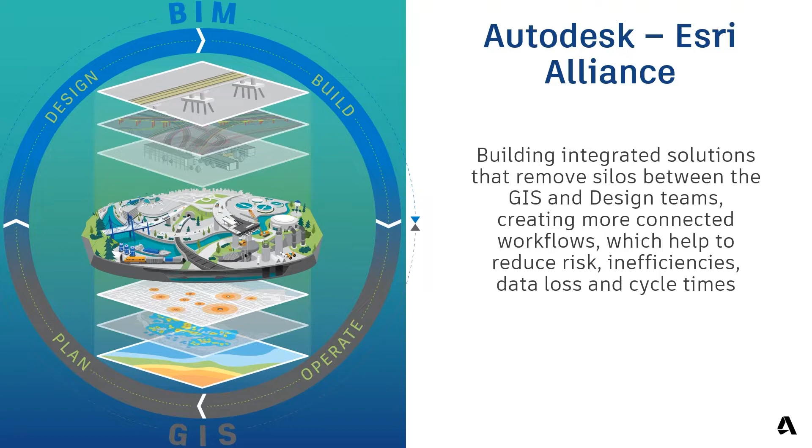Both Esri and Autodesk focused the first phase of our work on delivering product-to-product integrations and product-to-cloud integrations. Beyond product-to-product and product-to-platform integrations, our two companies have also been researching and delivering on platform-to-platform integrations.

Moving forward, we will continue to work with Esri and our joint customers to develop workflows that take advantage of our maturing integrations to add value to asset management workflows and connect to what cities want to do on smart city and digital twin initiatives. We believe that together we have the best solutions to solve customers' challenges.

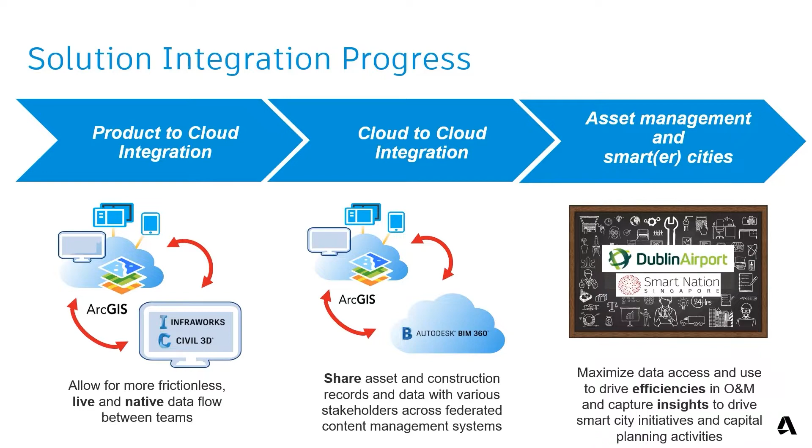This is the state of the integration, starting with a focus on what Autodesk development teams have been focusing on since 2017, which is mainly new functionality in our hero products, meaning Civil 3D, InfraWorks, and Map 3D, that connects Autodesk design solutions to the Esri platform, ArcGIS Online and ArcGIS Enterprise. This functionality is referred to as the Autodesk connector for ArcGIS.

So let's take a look at the agenda for the next slide, showing how the current functionality works. In the next 5 short videos, I will walk you through a workflow for using the Autodesk connector for ArcGIS inside of InfraWorks and Civil 3D. This workflow will show you how to connect to ArcGIS Online from InfraWorks and Civil 3D, performing SaveBack from InfraWorks and Civil 3D, and publishing to ArcGIS Online from InfraWorks and Civil 3D. There will also be other functionality and workflows shown that accompany these 3 things.

Then I have included 6 What's New videos for InfraWorks and Civil 3D and put them in order of release. You will see some of the same functionality in the previous 5 workflow videos, but this puts things in order for you, and more specifically, what features came out when. I will also take you through in a short video how this same functionality works in Map 3D.

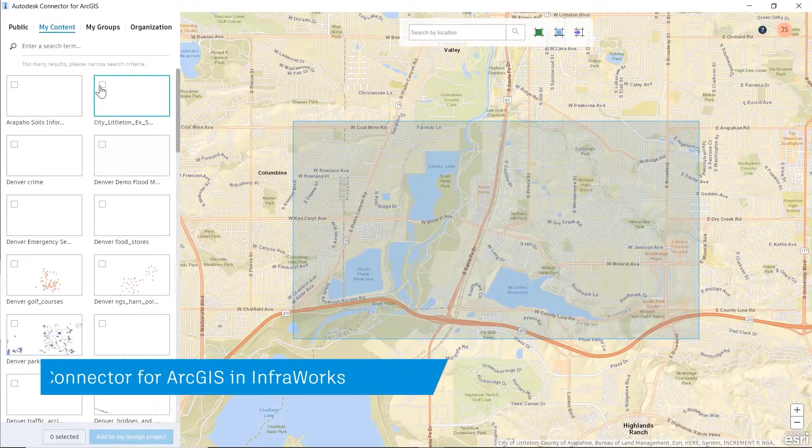Now we are ready to start using the data that we pushed to ArcGIS Online. We will start in InfraWorks and will connect to the data using the connector for ArcGIS. We will be connecting to the same sanitary sewer data that I received from the City of Littleton. Once I select the feature layer, I can map the information to feature types in InfraWorks so that the data represents what I want to see visually. I can also preview the data visually to be sure I have what I want.

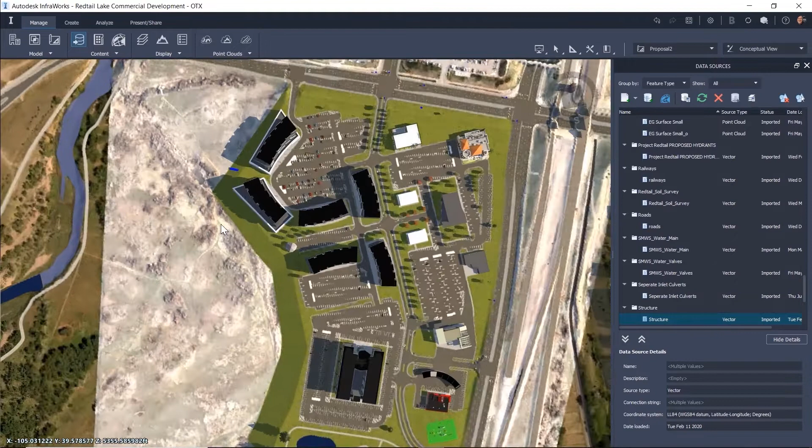Once the data has been added to my model, there's some configuration that I will want to do to represent the sewer correctly. First, if I switch to an engineering view, I will be able to see beneath the surface. This will help with visualizing the sewer lines as they populate. Next, I will configure the pipe's data source. This is the sewer lines themselves.

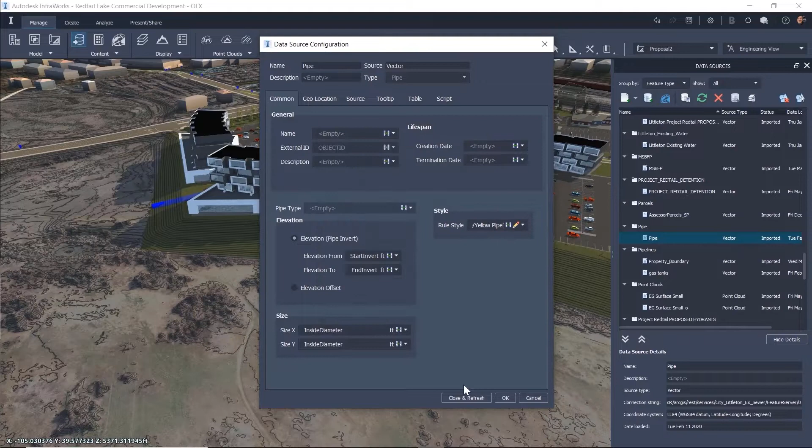I want to represent the actual invert information for these pipes, so I will map the correct attributes from the data in ArcGIS Online to my elevation from and elevation to inputs. I also want to see the correct size of pipe, so I will map the corresponding attribute to the X and the Y size to reflect the correct sizing. The last thing I will set up is the style of the pipe. In this case, I want it to be shown as a yellow pipe. After selecting Close and Refresh, you will be able to see the pipes populate and the correct invert elevations and the correct sizing, all coming from the attributes in ArcGIS Online.

Next, I will configure the way the structures will look visually. In this instance, I want to represent the sewer manholes as a yellow circle. I also want to represent the size of the manhole from an attribute in ArcGIS. In this instance, I want to change the X and the Y size with the attribute part size ID.

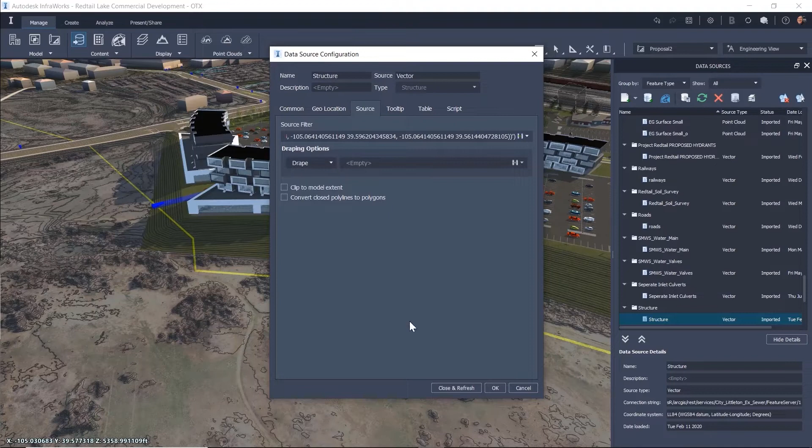The elevation offset will be mapped to another attribute called depth. I will add the attribute and put a negative sign before it and show the manhole going down in the ground. This will match the inverts of the pipe. Once you close and refresh, the existing sewer is represented in the way that we want.

You can see if we select one of the manholes that we have access to the attribute information that resides in ArcGIS Online. The same will be seen if we select one of the pipes in the model also.

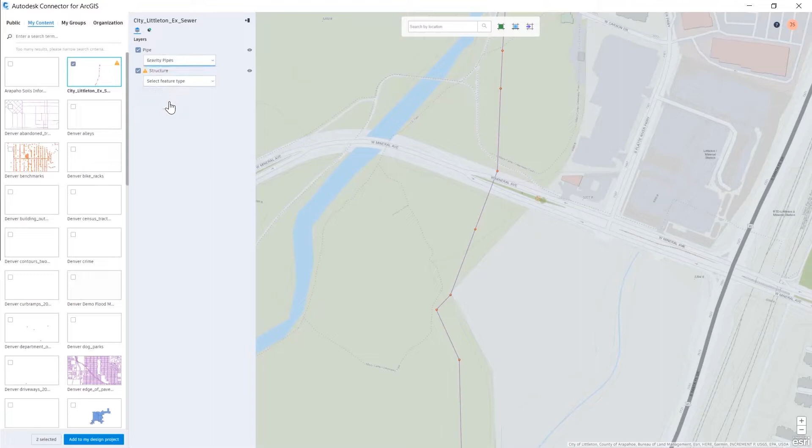Now to Civil 3D. I can connect to ArcGIS Online and the experience feels much the same as InfraWorks. I can select the same sewer information and view it in preview just like in InfraWorks. But when we map the feature that will represent the data in Civil 3D, we can make the pipes come in as gravity pipes and the structures come in as gravity structures. That means on import, it will create a gravity pipe network in Civil 3D.

With schema mapping, you are able to map attributes from ArcGIS to civil properties inside of Civil 3D. For example, the structure height can be mapped to the attribute rim elevation. And we can map the start and end invert so that the pipe comes in the correct vertical location also.

Once the pipe network is created, you can select one of the structures and see that the as-built condition has been reflected in the structure. The same has happened for the pipe information also.

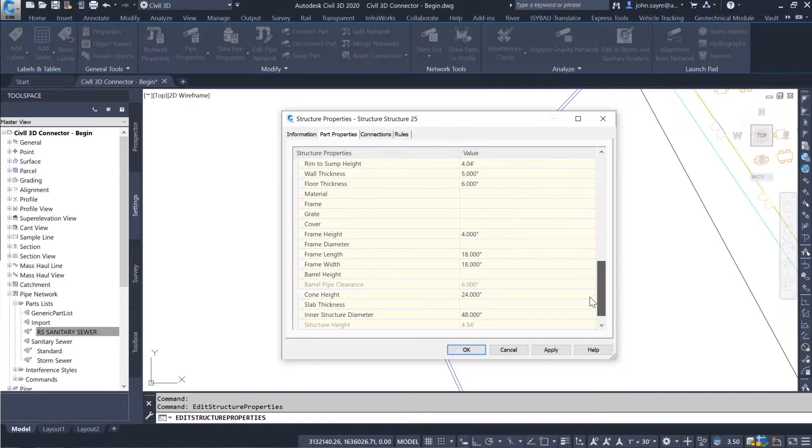We will continue the workflow in the next video by showing the functionality for save back changes to ArcGIS from InfraWorks, edit attributes in InfraWorks and save back to ArcGIS Online, refresh attribute changes from ArcGIS Online in InfraWorks, and then save back changes to ArcGIS from Civil 3D.

In InfraWorks, if a change needs to be made to GIS data that is connected to ArcGIS Online, you can perform what is called a save back in InfraWorks, and the change will update the feature in ArcGIS Online. For example, I moved this manhole horizontally in the model, then selected the data source and selected Save Back. When refreshed in ArcGIS Online, the manhole shows the location I moved to.

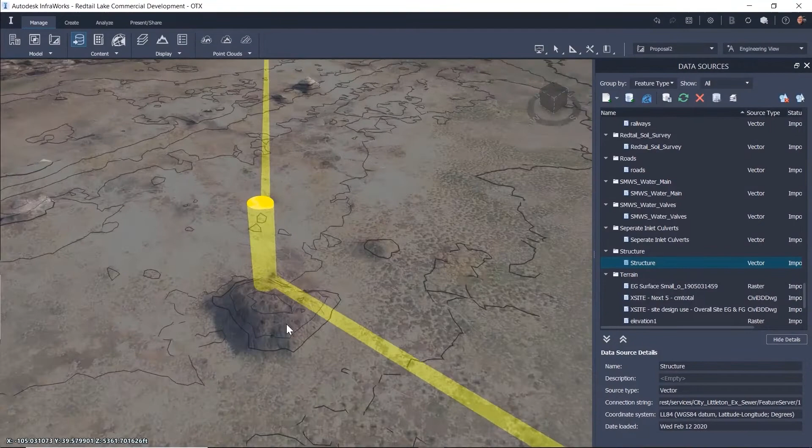The manhole has moved, but the pipes have not. In InfraWorks 2020.2, the pipes will update if you make a simple change to any of the ArcGIS attributes. This can simply be selecting the attribute and hitting Enter. InfraWorks then sees this as an update and the save back will perform correctly. The changes will then show in ArcGIS Online in the right location. This problem has been fixed in InfraWorks 2021.

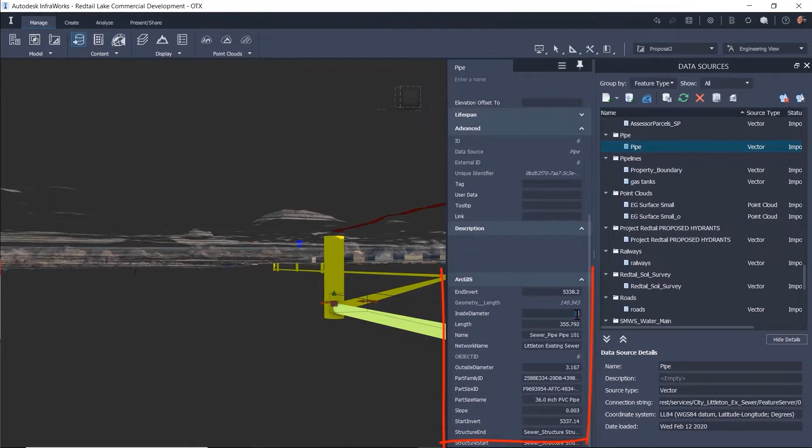You can also change the attribute information in InfraWorks and then save back to the data source, and the attributes update in ArcGIS Online. Notice I will change the inside diameter to 3.5 feet and the outside diameter to 4.0 feet. I will repeat this process in the next downstream pipe also. Now when I perform a save back, the attribute information is updated in ArcGIS Online.

To reflect the changes I just pushed to ArcGIS Online, when I select the pipe data source and refresh, InfraWorks updates the size of the pipe to the recorded value in ArcGIS Online. In this instance, it is a subtle change, but it reflects accurately.

If the pipe data was updated by a GIS analyst to reflect a change, InfraWorks maintains that live link to the data. So with a simple refresh, the attributes that were modified will update in the InfraWorks model. Remember, refresh updates the data from ArcGIS. The save back command updates ArcGIS data from InfraWorks.

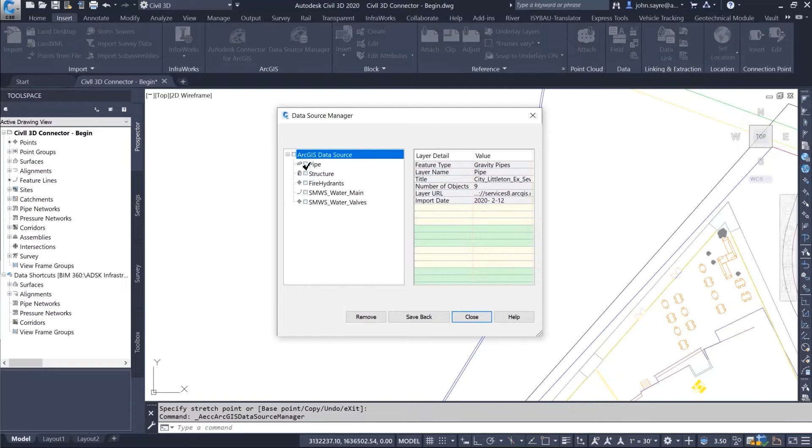If you need to make an edit in Civil 3D, you can use the saveback feature in the same manner. I will move the structure horizontally in my model, then open my Data Source Manager to access my connections to ArcGIS. Only select the data source you want to save back, then select Save Back. This will push the change to ArcGIS Online.

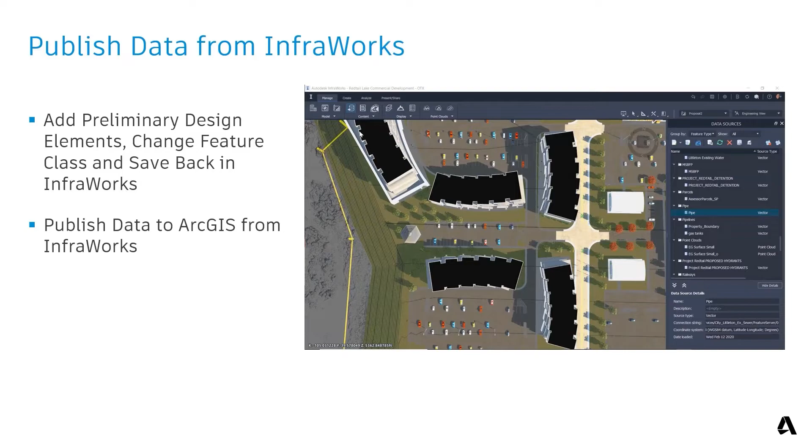Continuing on with the workflow, in this next video, we will show you functionality for adding preliminary design elements, change the feature class, and then save back in InfraWorks, and publishing data to ArcGIS from InfraWorks. In InfraWorks, a civil engineer can conceptually lay out a sanitary sewer line. Having rich existing conditions GIS data helps the civil engineer with this layout. In this example, it is key to know the existing location of the sewer line so that a connection with the proposed sewer can be made with confidence.

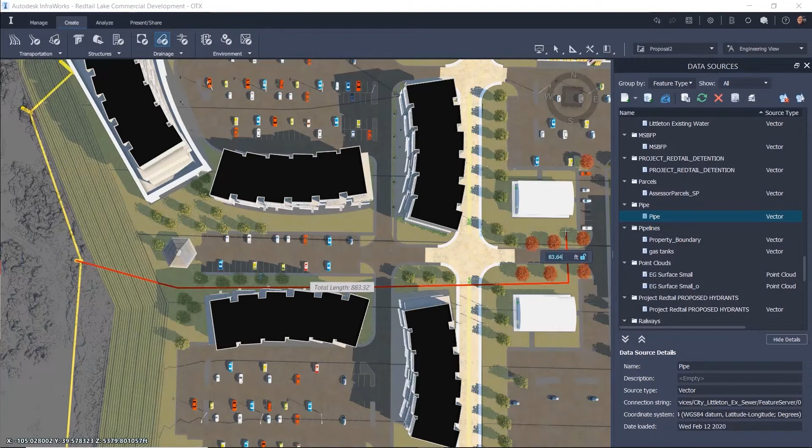Once the layout is in place, you now have the option of changing the feature class of the proposed layout so that it will inherit the attributes of another feature's ArcGIS attributes. This saves you time and allows you to add the necessary attribution quickly. The values in the newly added set of attributes can be modified and filled out.

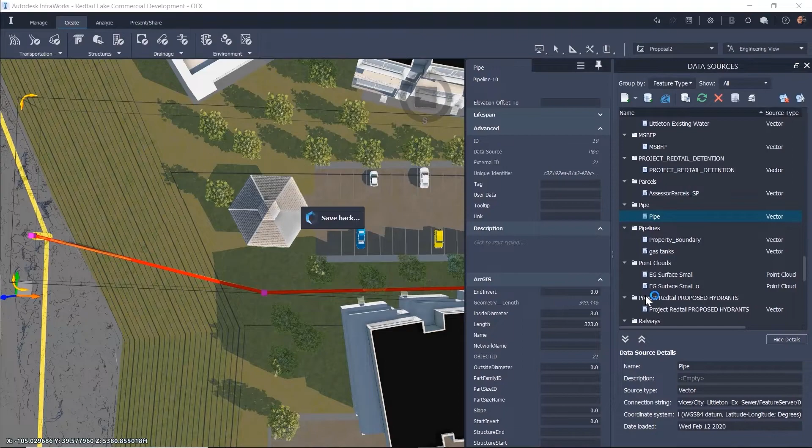Then, since the feature class has been changed to a feature that is in the model, you can perform a save back to the data source and the new line will reflect in ArcGIS Online. Not only the line work, but the attribute information that was added in InfraWorks also. When the view in ArcGIS is refreshed, you will see the newly added line and the same attributes as the existing lines with our updates to the attributes.

The last example was just one example of how to get conceptual design into ArcGIS Online. In this next example, we will publish a proposed sewer layout as its own feature layer in ArcGIS Online. This allows a civil engineer to show the design intent by collaborating with all stakeholders from a central source of data.

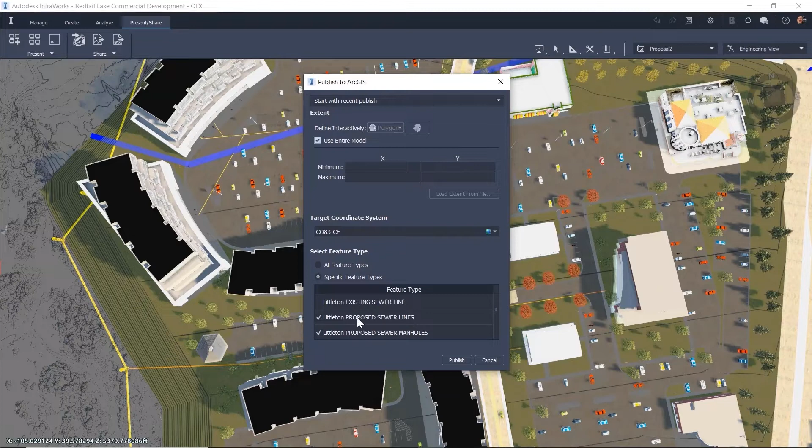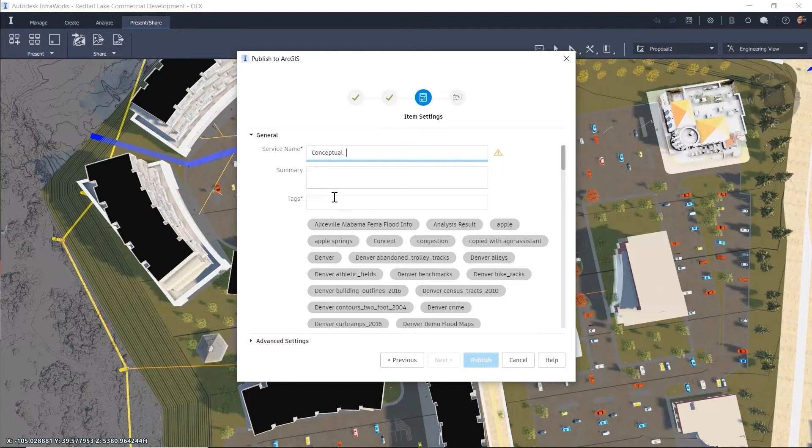When publishing to ArcGIS, you have control to select all feature data sources or just specific feature data sources to create a new feature layer in ArcGIS. This gives the civil engineer the flexibility to provide just the data needed to convey intent. When you publish to ArcGIS Online, it is important to add specific tags to the data being published. This will help everyone that will be accessing this data at a later time.

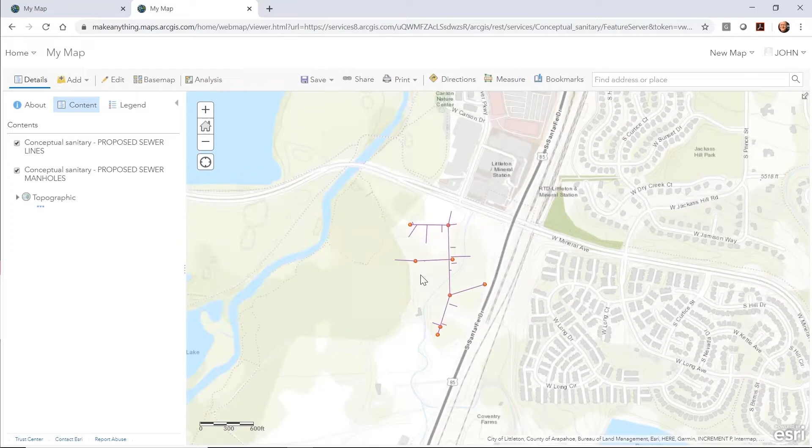Once the data has been published, you can instantly view the data in ArcGIS Online. Now, this proposed sewer layout can be consumed by stakeholders and design decisions can start to be made. We will continue on with the workflow in this next video by showing the functionality for publishing to ArcGIS Online from Civil 3D and visualize the design from Civil 3D in InfraWorks.

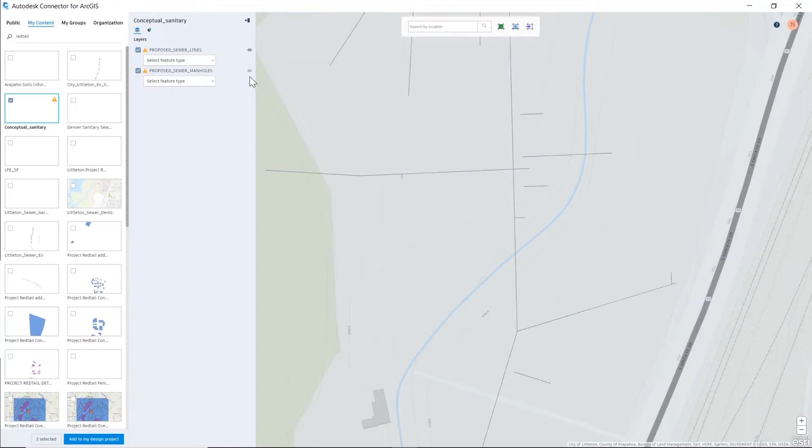Now that we have a conceptual layout of our proposed sewer that has been published to ArcGIS Online, as one of the stakeholders in the project, I can connect to that data and bring it into Civil 3D and create a final design. I have the option to bring the data in as gravity pipes and structures, but this data is just for layout purposes and might not have all of the data I might need for a gravity pipe network in Civil 3D. So I can represent the sewer lines as feature lines and the manholes as points. This will give me what I need to start design.

Once added to my model, I can see the conceptual layout visually, which saves me time as a designer. As a designer, I can take this conceptual layout and start my design by creating a pipe network. This process allows me to design the proposed sewer, selecting the parts I will use, the surface I will be setting the rim elevation to, alignments to follow, etc. Placing the manholes and pipe in Civil 3D is faster for me because I have a location that has been provided to me from ArcGIS Online. I can create the network, create a profile, and add my vertical design to the sewer very quickly.

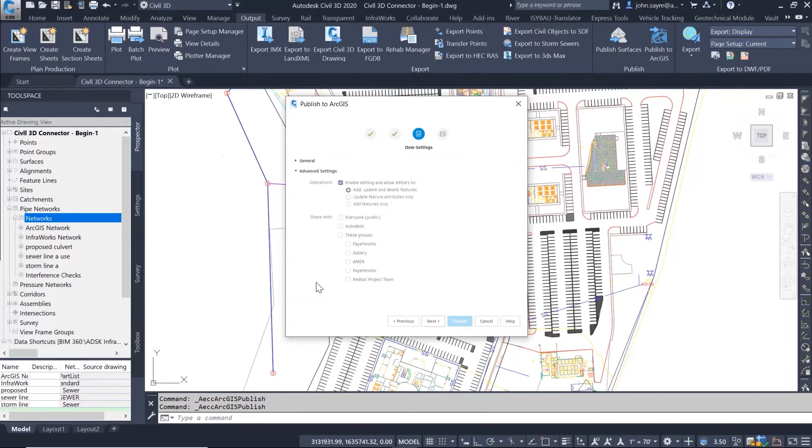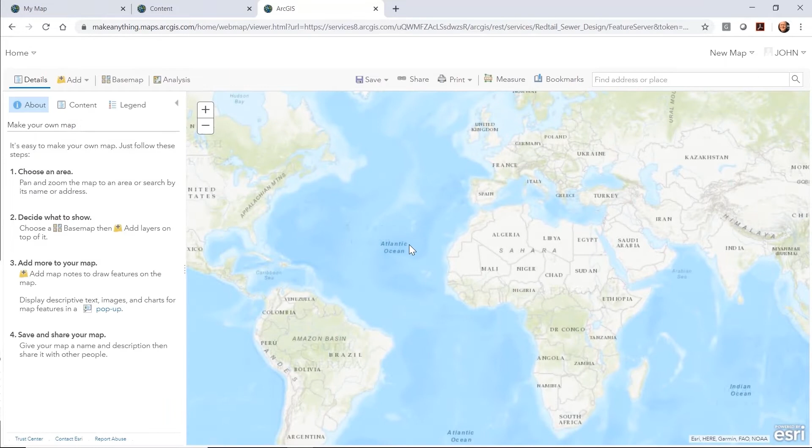Once this has been approved as the final design, the pipe network can be published to ArcGIS Online so that it can be made available to all stakeholders on the project. This information could be used by a stormwater engineer, for instance, that might be placing inlets and pipe and need to know the location and vertical depth of the proposed sewer. Once published to ArcGIS Online, stakeholders can view and connect to the newly published design data. This is the design of our sewer, so this will help them avoid collisions and enable them to make good design decisions now on the utility they are designing, instead of having problems in the field.

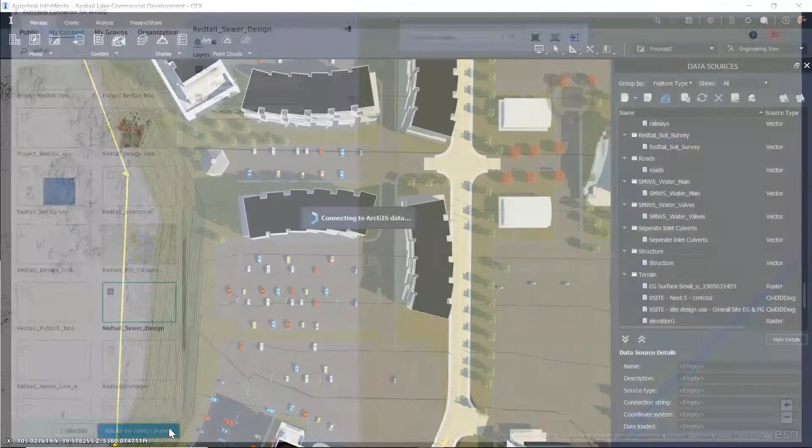Oftentimes, a civil engineer needs to talk with all stakeholders about the final design of the project. Now that we have the proposed sewer in ArcGIS Online, we can use InfraWorks to convey the design to all stakeholders in a 3D contextual environment. Sometimes 2D plans can be hard for people to completely understand. If the data is in a 3D environment, it makes it easier to show intent.

We'll use the attributes for the design to accurately reflect the proposed manholes in our model. We will do the same thing for the sewer pipes, adding the designed inverts in and out, and show the designed pipe size, all from the attributes in ArcGIS Online.

With the actual design represented correctly in InfraWorks, you can now see how it affects everything in the model. You can also access the structure information and pipe information directly in InfraWorks. This workflow helps all stakeholders to better understand the project.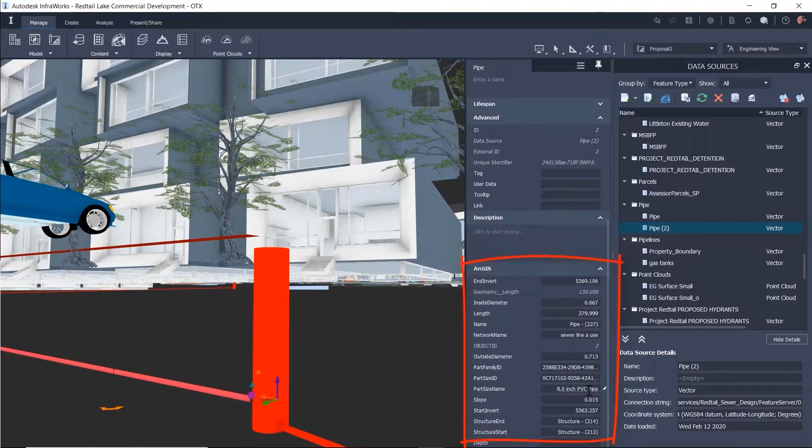Continuing on with the workflow, in this next video, we'll show the functionality for creating custom attributes using property sets from Civil 3D. And then we'll publish to ArcGIS Online the newly added attributes from Civil 3D. In Civil 3D, we have the ability to add what's called property set data. This is a great way to add additional rich attribute information that will be included when you publish to ArcGIS Online.

In this example, I am creating a new property set style that I will be able to add to my proposed sewer manholes. You can create attributes that will help with asset management, such as who the manholes were installed by, the date of the installation, and the condition of the manhole when you might be inspecting it. These attributes can be applied to the manholes of choice.

In this example, we are publishing as-built information for a city or municipality. This is just a small example of the data that can be added for asset management and can be added upon at any point.

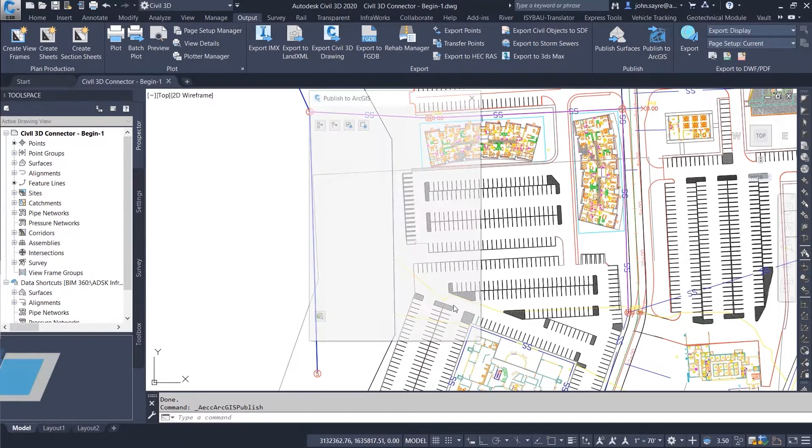This example is as if I'm publishing the as-built information for this project. And as you can see, when going through the publishing process, there are no additional steps to get the data we added to publish. Just by using the typical publish to ArcGIS command, all of the data will be pushed. Keep in mind though, if additional property set data is added in Civil 3D in the future, you will need to run the publish process again.

After the publishing process is complete, you can take a look at the newly published as-built data in ArcGIS Online and verify that the attributes have been included.

In the next set of videos, you will see the order and time of when this functionality was added to Infraworks and Civil 3D. Highlights from the Civil 3D 2020.1 video are: the Autodesk connector for ArcGIS is introduced to Civil 3D. We'll be utilizing the pipe schema mapping to create gravity pipe networks in Civil 3D. We're able to edit GIS data and save back to ArcGIS Online from Civil 3D, and publish to ArcGIS from Civil 3D.

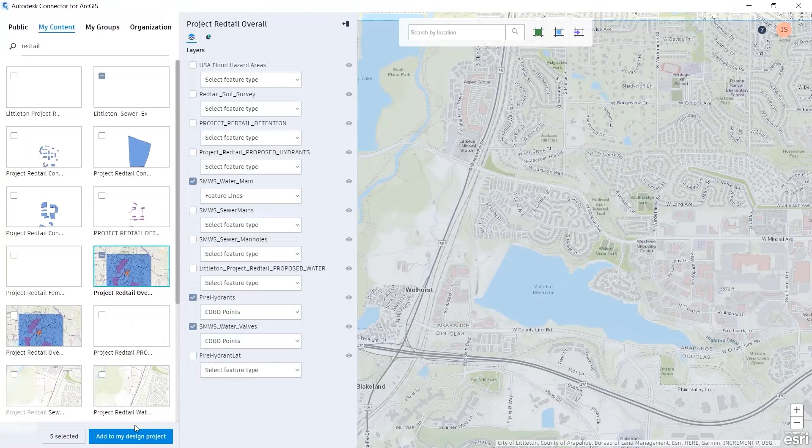Inside of Civil 3D 2020.1, you can now access ArcGIS Online directly inside of Civil 3D via the connector for ArcGIS. With the connector, you can streamline the population of rich GIS data directly into your design environment, which will help you to make design decisions for your project. You can quickly select how you want the data represented inside of Civil 3D. With pipe network schema mapping, you can map attributes from the GIS data attributes to populate in your pipe network.

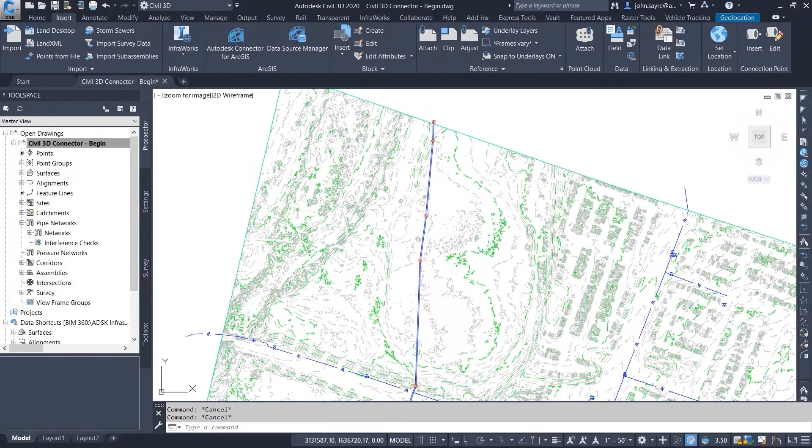When working with your GIS data, you want to be sure that you are working with the most current information. The connector keeps that live link to the data when updated in ArcGIS, but now you have the option to make changes to that data in Civil 3D and perform a save back to ArcGIS. In this example from our high-resolution image, we can see that the manholes might not be located correctly. You can update the location and then save back to ArcGIS. This updates the information in ArcGIS Online.

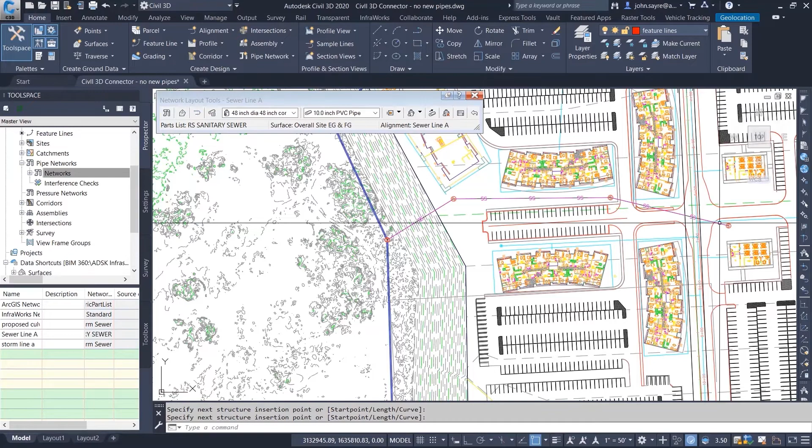Having rich GIS data is key when moving into the design of your project. It helps the civil engineer to make better design decisions, such as horizontal and vertical alignment of new utilities. During the process of design, when the design is approved, through construction, and when as-builts are created, this data needs to be updated at all stages of the project to reflect the latest information.

Now with the ability to publish to ArcGIS Online, you can take advantage of the live link to data and ensure that not only existing conditions data is up to date, but all stages of the project data is up to date and can be accessed by all stakeholders.

Moving on to Infraworks 2020.1, some of the new functionality included was change feature class of newly created objects, save back to ArcGIS Online from Infraworks, and publish to ArcGIS Online from Infraworks.

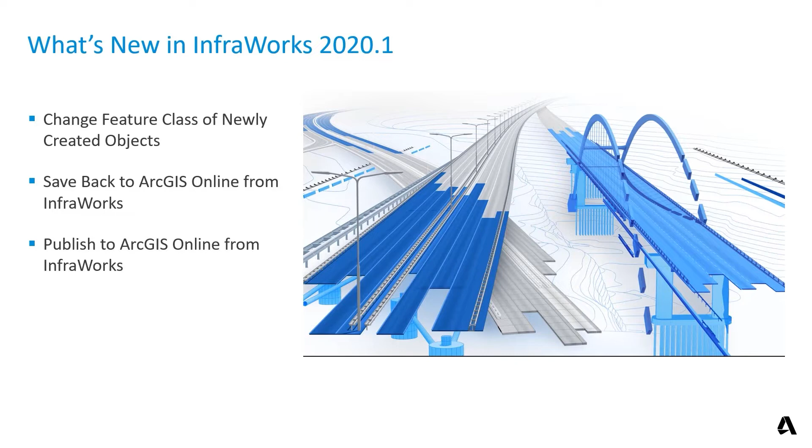One of the new features in Infraworks 2020.1 is the ability to add a new feature in the context model and then change the feature class to match a data source that you've already added from ArcGIS Online. In this example, we need to add a proposed water main to service the rear of the project for fire protection. After we've laid out the location, we can then change the feature class to a feature layer that we have in ArcGIS Online that represents the proposed water line layout for our project.

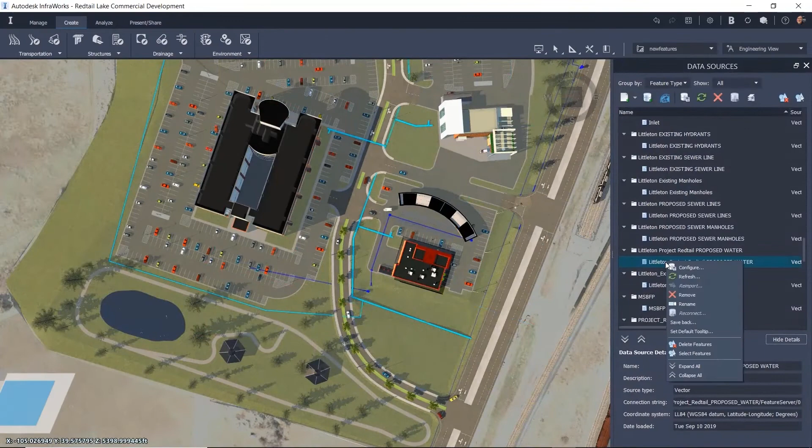This lets all stakeholders take advantage of the live link to your GIS data. Not only can you save back the location, but you can add attribute data that is also saved back to ArcGIS Online.

Another new feature in Infraworks 2020.1 is the ability to publish information from your context model directly to ArcGIS Online. This same information can also be published to a portal. The user has control to define the area that they would like to publish by manual selection or select to use the entire model. This selection process applies to the feature types being published also.

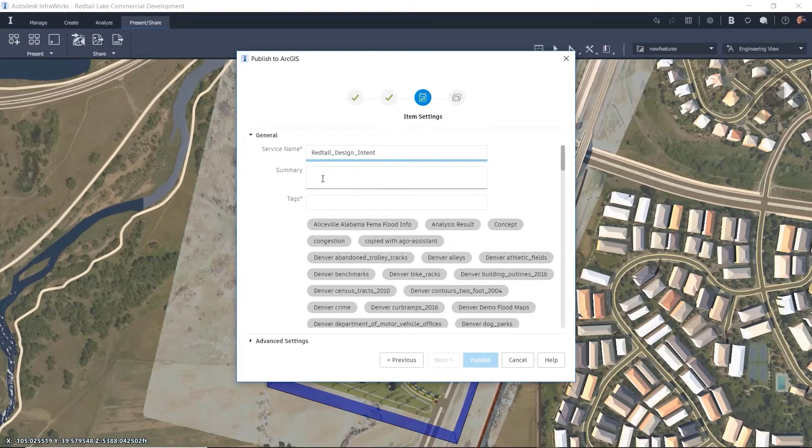You can control the category and feature layer naming for the information being published and add specific tags so that the information can be searched for more efficiently in ArcGIS Online. You can also select who you would like to share this new data with before publishing. That ensures that the right people are able to access this published data. Once the data is published, all stakeholders will be able to take advantage of the information in ArcGIS Online.

In Infraworks 2020.2, some of the new features that were introduced were being able to export to a file geodatabase for use in ArcGIS Pro from Infraworks. You could select specific attributes to export in that file geodatabase, and you can select specific attributes to export to ArcGIS Online also. There are times when you are sharing your GIS data with stakeholders that you might not want to include all of the attribute data associated with a specific data source.

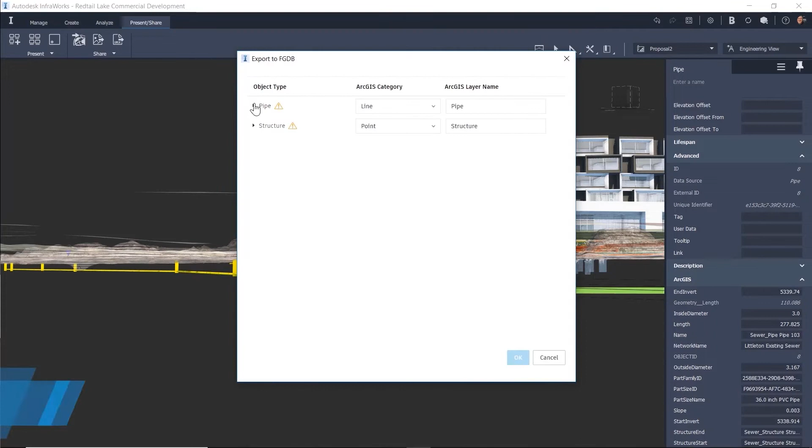One of the new features in Infraworks 2020.2 is focused on solving this problem and adds the additional functionality for the Autodesk connector for ArcGIS. Now in Infraworks, when exporting a file geodatabase for use in ArcGIS Pro, for example, you have the option to select specific attributes from the data you're publishing instead of exporting all of the attributes at one time. This gives a user more control over what is being published.

In this example, I could have sensitive information that I need to have access to internally for this sanitary sewer system, but maybe don't want to distribute all of the information to everyone. When the file geodatabase is added in ArcGIS Pro, only the specific selected information will be available for the assets.

Not only is this functionality available when exporting a file geodatabase, the same functionality is available when publishing information to ArcGIS Online. It is also available if you're publishing data to an ArcGIS portal. This new feature ultimately gives the user the ability they need to deliver only the attributes they want to share when distributing any of their GIS data.

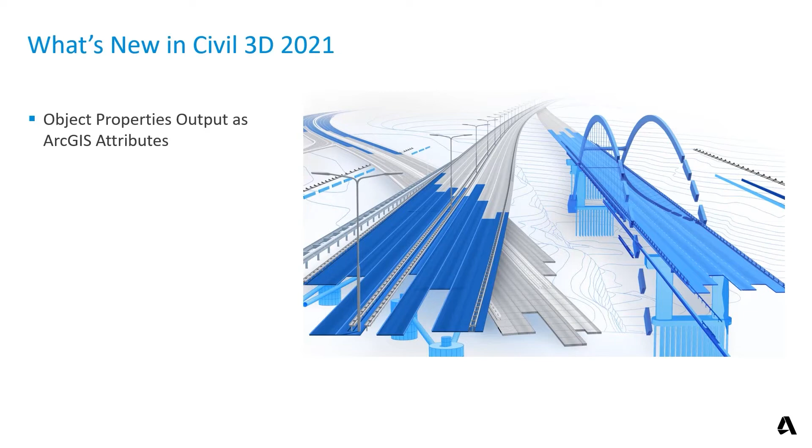At global launch of product year 2021, only Civil 3D had new features. The new feature to highlight would be object properties output as ArcGIS attributes. One of the new features in Civil 3D 2021 focuses on object properties when publishing to ArcGIS Online. In this example, a user has as-built information for a sanitary sewer that they would like to publish to ArcGIS.

When a user publishes data, you want to be able to filter out any sensitive data that might not need to be public. Now when you publish data, you can select only the key data that you want to publish to ArcGIS instead of all the data at once. In Civil 3D 2021, all of the data that was assigned to the pipes is available for publishing, and you can edit the category names to customize the attribute fields when published.

This gives the user more control over not only what attribute data they want to publish, but also how it will be represented in ArcGIS Online. Once the publishing process is complete, you can view the newly published data in ArcGIS Online. Inside of ArcGIS Online, when the same pipes are selected, you can see that the desired data was published with the custom field attributes.

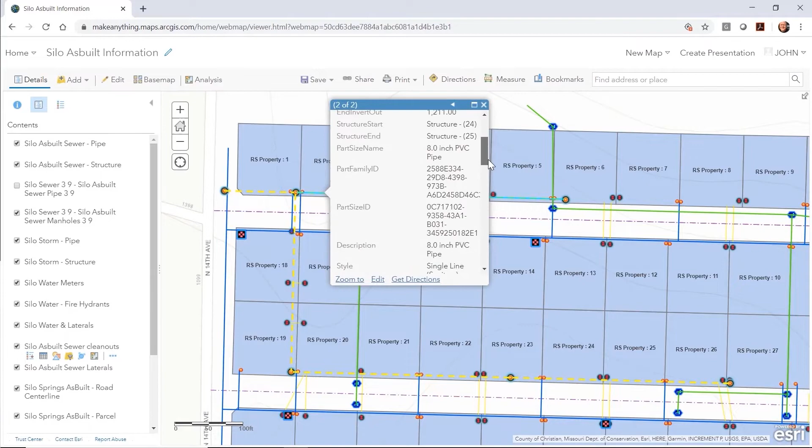In the .1 release of Civil 3D 2021, more features were added, including curve support when exporting to file geodatabase from Civil 3D, edit ArcGIS attributes directly inside of Civil 3D, and then move newly added features to an ArcGIS layer.

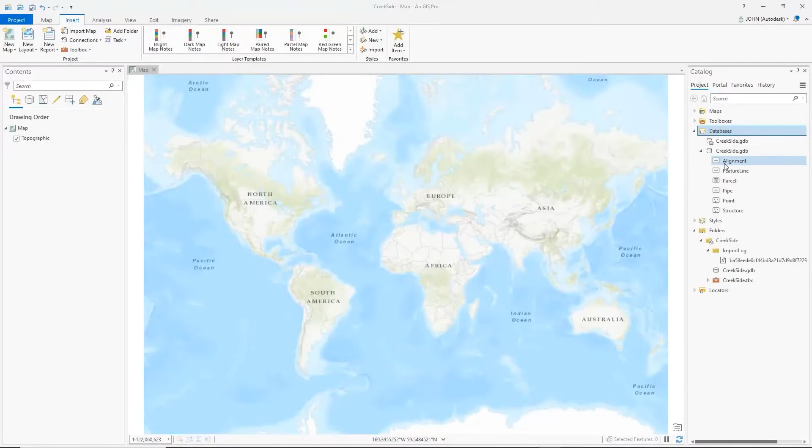In Civil 3D 2021.1, there have been several new features added around the Autodesk connector for ArcGIS. Now when you export a file geodatabase inside of Civil 3D for use in ArcGIS Pro, civil features like alignments, for instance, that have curved geometry are represented as true curves and not tessellated line work.

Another enhancement that's been made is the ability to edit attribute properties of an ArcGIS object directly inside of Civil 3D and then save back the edits to ArcGIS Online. This gives the user a more efficient way of updating rich GIS information.

Any attributes that were edited directly in Civil 3D are now available in ArcGIS Online. Now also in Civil 3D 2021.1, a user can add additional information to an existing ArcGIS layer and then save back that information to ArcGIS. Once the desired geometry is in place, you now have the option to move the selected geometry to an existing ArcGIS layer.

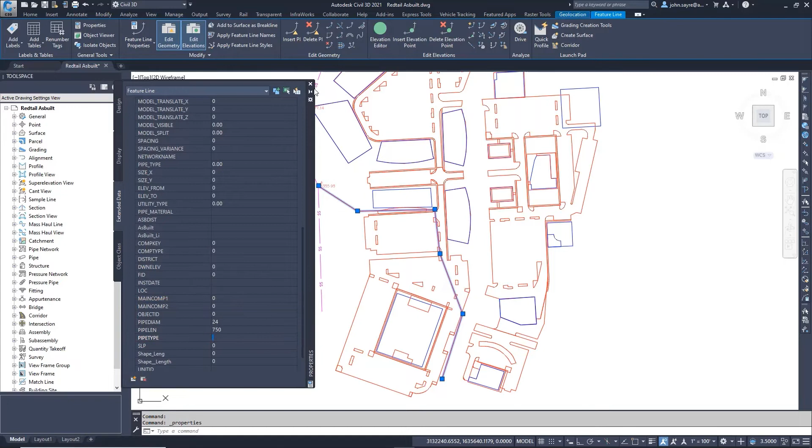If you take a look at the properties, you can see that all of the attribute entries from the existing ArcGIS layer have been added to the newly created geometry. With the same set of attributes now on our new geometry, a user can then populate the attributes directly inside of Civil 3D. When a save back is performed, all of the new geometry added and added attribute information will update the feature layer in ArcGIS Online. This gives the user great flexibility in creating, updating, and managing GIS data.

In the latest update for Civil 3D 2021.2, new features for the Autodesk connector for ArcGIS included raster layer support for imagery in Civil 3D, raster layer support for terrain data in Civil 3D, and then refresh existing data layers in Civil 3D. New inside of Civil 3D 2021.2 is the ability to bring in raster imagery from ArcGIS Online via the Autodesk connector for ArcGIS.

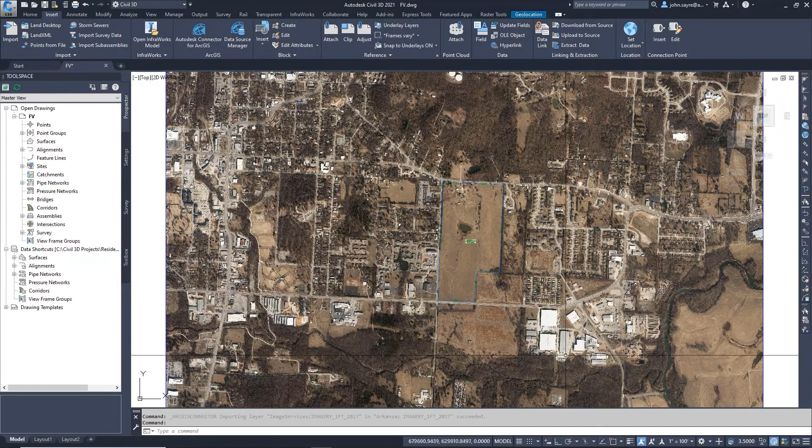In this example, I will use an image that covers the entire state, but I will only use a small section of that image. You have two new feature types to choose from inside the dialog, imagery and surface. You have the option of selecting a predefined resolution, or you can simply select the source resolution. You can repeat this process if needed and have multiple images at different resolutions.

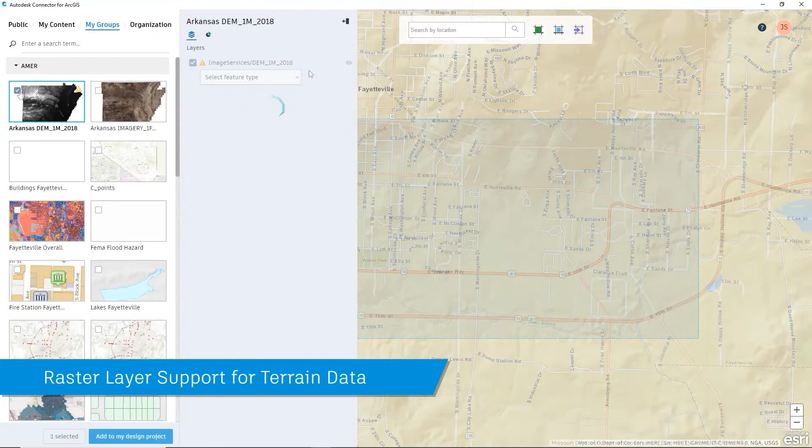In addition to being able to bring in raster imagery from ArcGIS Online, you can also utilize terrain data from a raster layer in ArcGIS Online that will create a surface for you in Civil 3D. You again have the option to select an image resolution or use the source resolution of the raster data. Once applied, a surface is created for you in Civil 3D.

Another new feature in Civil 3D 2021.2 is the ability to refresh existing layers from ArcGIS Online that are already being utilized inside of your Civil 3D model. Refresh will allow us to quickly retrieve the latest information from ArcGIS Online. So when a change is made to the data, in this example, a manhole was not in the right location, you can take advantage of the live link to the data to be sure that you have the latest information available to you in your model.

Inside of the Data Source Manager, you can select the data sources that you would like to refresh, and the connector will fetch the latest information and quickly update your model.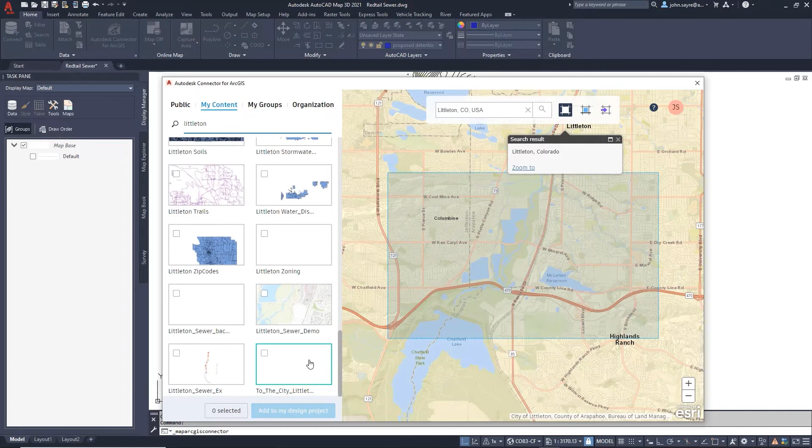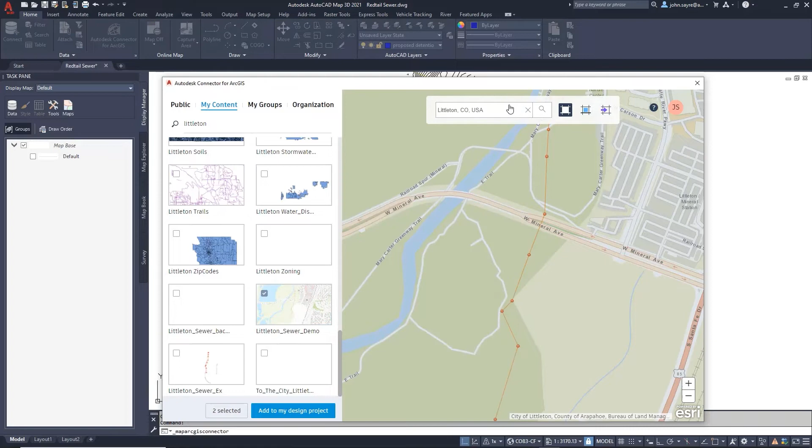Inside of Map 3D, you can access the connector for ArcGIS, and the experience is much like the experience that you have in InfraWorks and Civil 3D. To show the functionality, I will go back to Littleton, Colorado, and we will connect to the existing sewer information from the city that is housed in ArcGIS Online. In this familiar dialog, we can preview the information that we want to bring into our model. Now we are ready to add this information to our project in Map 3D.

Once the information is added, we might want to stylize the manholes and the sewer line differently than it is shown. We will start off by modifying the manholes, changing them from a rectangle to a circle. We will also change the fill color to red. On to the pipes. All I want to change here is the color of the line. We will change it to red. You could also access custom line types if you have them available.

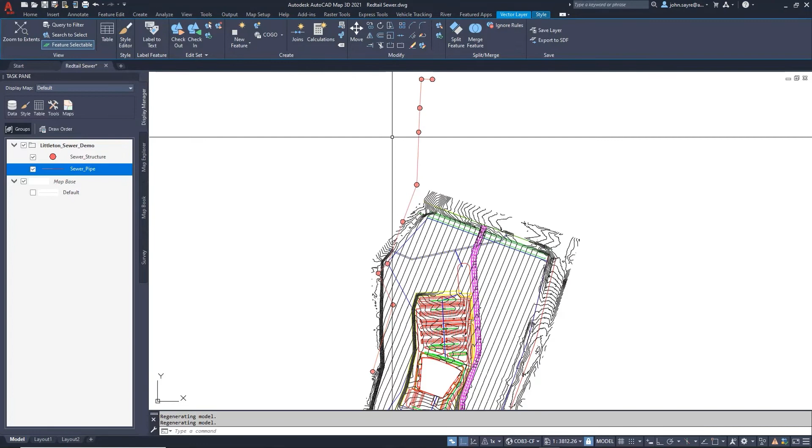Using typical Map 3D workflows, you can select one of the pipes and show the data table. The data table allows you to see the information for all of the pipes, and if you select one of the pipes in the data table, it highlights for you. We can also edit the GIS attributes in the data table.

With our edits complete, you simply check in the edited features. When you use the check-in feature in Map 3D, the live connection to ArcGIS Online updates the attribute information inside of ArcGIS Online.

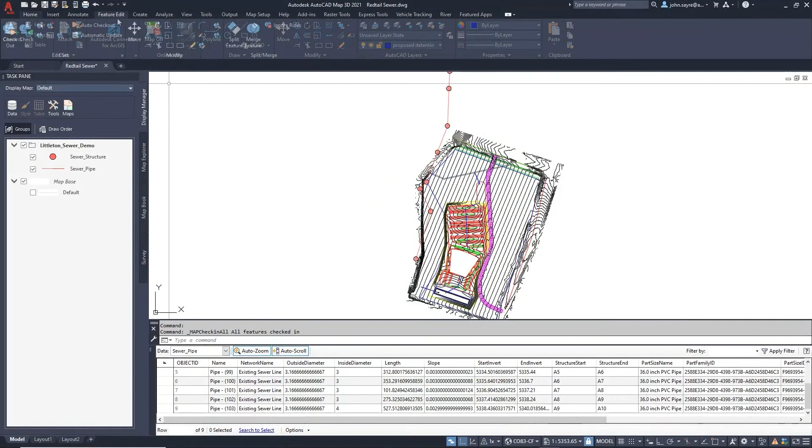To complete the workflow, if any of the attribute information is modified in ArcGIS Online, then we will get that update in Map 3D with a simple refresh of the data. Notice that the inside diameter change that we made in ArcGIS Online is now reflected in my model.

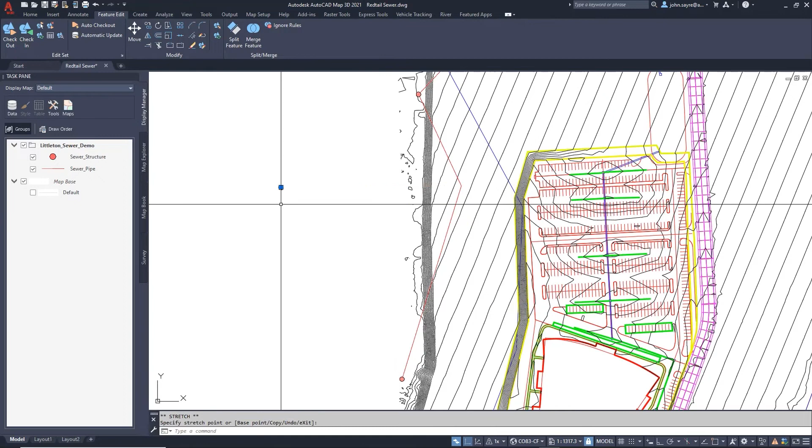If I need to move any of the geometry, I can select and check out that geometry and then move it to the desired location. I would again use the check-in feature from Map 3D to update through the live connection to ArcGIS Online. And with a simple refresh of my web browser, I can see the change.

In Map 3D, I can also add additional line work to my drawing and push that line work back to ArcGIS Online. In this case, I will add a couple of sewer pipes and manholes. In the map workspace, I can select the feature layer I want to add to, right-click, and select New Feature from Geometry. Then select what I would like to add.

Once added to the feature layer, you can open the data table and start to fill out any and all of the attributes that have been added to the line work. The same thing can be done with the manholes. The manholes that are shown are just AutoCAD blocks. You can select New Feature from Geometry and pick the block the same as you did with the line work.

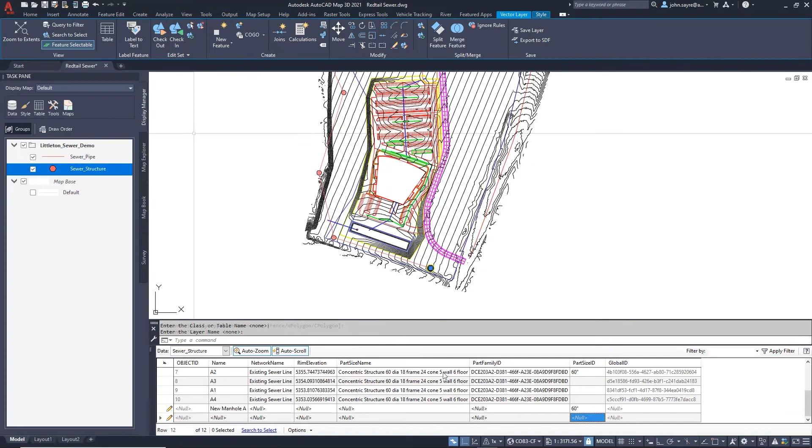And again, you can edit in the data table any or all of the attributes that are shown in the data table. When you are ready, you can select Check In from the ribbon and it will push the changes to ArcGIS Online.

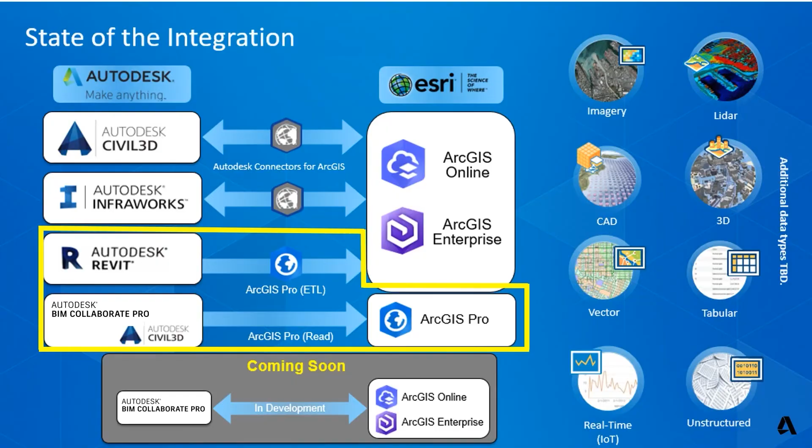Esri's initial focus was on enhancing capabilities that provide better access to data created in design. One area of focus for them was the ability to directly read Revit models into ArcGIS Pro. ArcGIS Pro reads the source data and dynamically interprets it as if it's a collection of GIS feature services without changing the source file. It is a great way to spatially manage a group of individual assets and can also be used to tell a project story to stakeholders over the web.

GIS users with this capability have said that it provides visibility into models across a large geographic area in a familiar, easy to use way with drill-down access in a browser-based secure environment. It enables the merging of disciplines to see the full picture of a project, or a grouping of assets, which brings operational and transparency gains.

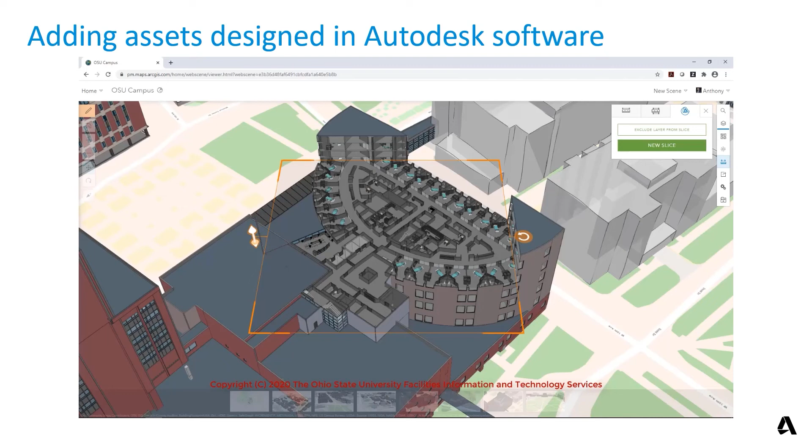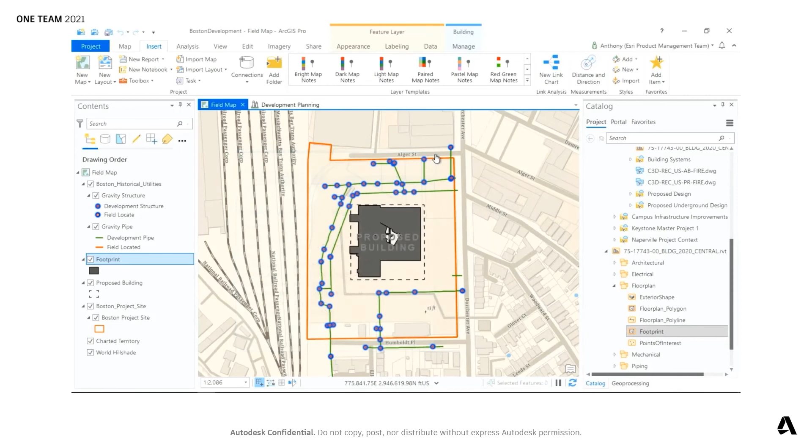What Esri added in July of 2020 was the ability for GIS professionals to access design models, including Revit files, Civil 3D models, and basic AutoCAD drawings, directly from within BIM 360 and Autodesk BIM Collaborate Pro. Team members will now know where data is and how to find it. They'll know they are working with the most current information, as they have a direct connection to the information the engineering and design team is creating.

Let's return to the state of the integration slide and focus on what Esri's been delivering in the area of product to product and product to platform. Now let's talk about the coming soon. They're also working on platform to platform. It's a solution that is coming soon called ArcGIS GeoBIM. ArcGIS GeoBIM is all about connecting the platforms.

Esri is creating GeoBIM web apps that create the connection to BIM 360 and the Autodesk Construction Cloud. This enables a user to utilize mapping and visualization, look at engineering documentation, utilize project issue dashboards, visualize the project progress, be collaborative with issue management, and create and resolve issues from GIS.

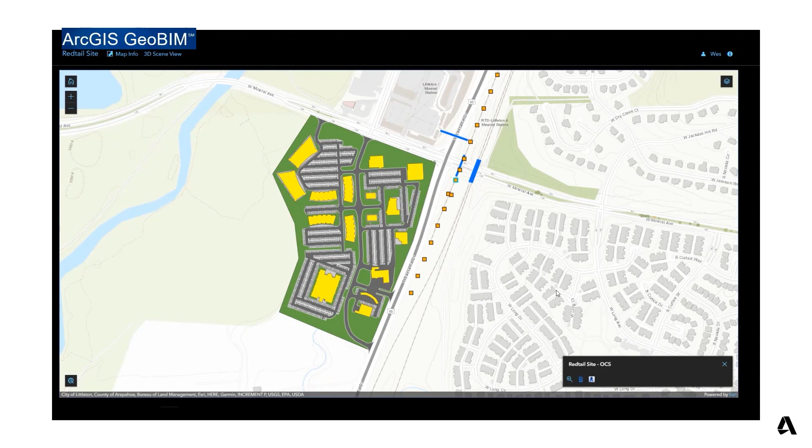This video was developed in cooperation with Autodesk. What this video demonstrates is the powerful integration solutions that can be built using Esri's web services and the Autodesk Construction Cloud. What this shows is the frictionless, live, and native data access between platforms.

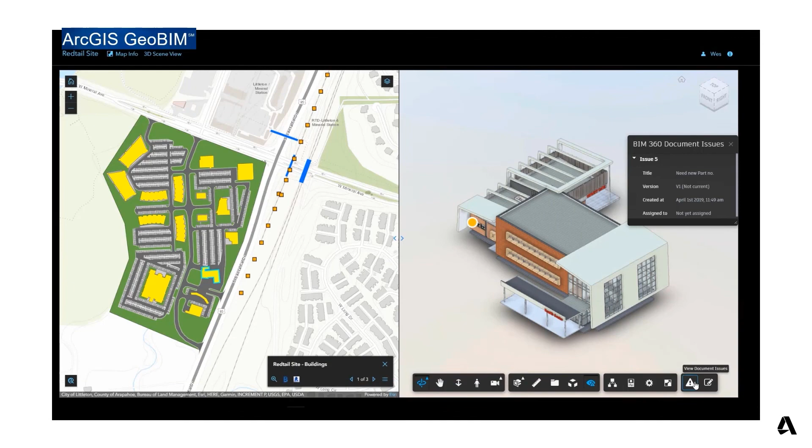This web app connects project and asset information managed in BIM 360 or the Autodesk Construction Cloud to ArcGIS in a way that helps solve the problems the industry is facing in working with potentially huge data that may only be needed by certain people at certain times. The video demonstrates that it was possible to provide access to live BIM models from within an easy to navigate spatial environment, connecting project delivery to O&M.